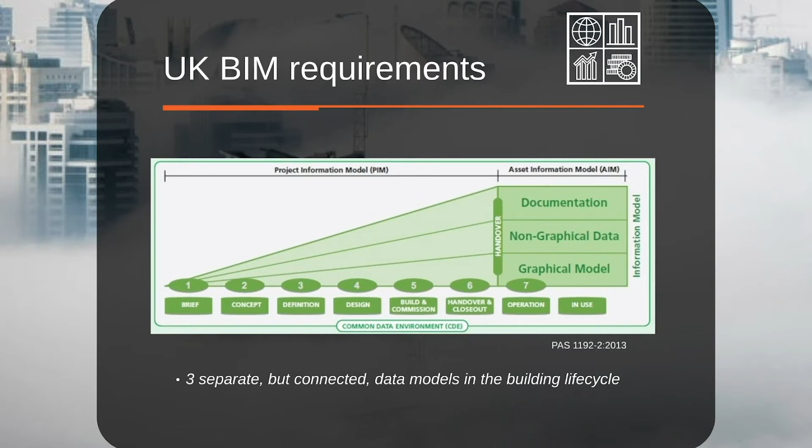We are aiming at taking care of and establishing the data models for the life cycle of the building. We started out with the requirements data model, that's the owner requirements and equipment plans. We have also been quite strong in capturing the modeling information, and we are also giving value to construction and operation. The project I'm going to talk about today is the operational phase for the Terminal 2 project, Oslo Airport.

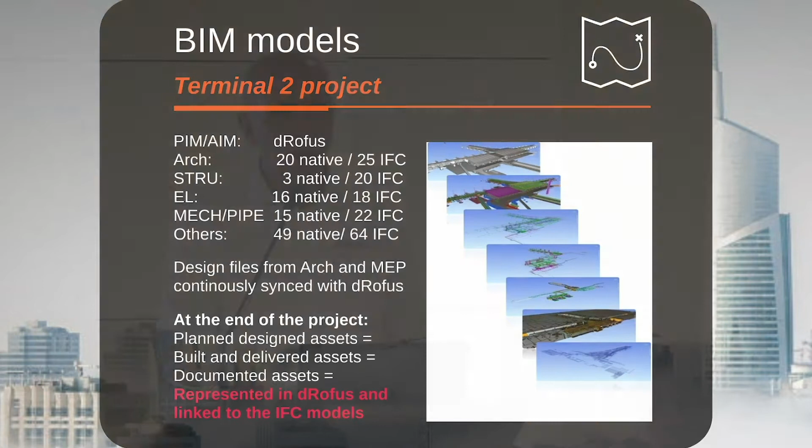They synchronized the design and engineering files continuously with dRofus. That made it possible for them to deliver at the end of the project not only updated design models, they also had a database that was connected to the design models, holding all the asset data and all the documentation about all the assets. That's a quite unique situation to have at the handover of a project. And obviously it didn't come for free. There were a lot of processes involved, which I will come back to.

And then we are into BIM in FM, and they said, if we use the same database, we have some benefits here. They will eliminate the handovers. If you use one database for assets, it's only the status change of the asset that is different. Because if you finish a project, you immediately start to renovate it.

So their issue was that we need to track our assets for security reasons from when we buy the asset until demolition. We need to know the whole history, and these handovers in project phases are messing everything up. We always lose data. Even if we use COBie, whatever we use, we want it to be in one database and simply change the status of the assets. That will solve their problem on the handovers.

Also with the documentation, if you build it up in one database, it's available throughout the project and in operation. And the maintenance people can always track back to the planning and the requirements. They use dRofus also as the one single source for creating unique IDs for assets across all applications. That made it possible for the applications to talk to each other about the same assets.

And that made this solution, where they early on said that we put in dRofus as the master asset database, not only in project, but also in operation. Then we synchronize between dRofus and their FM system, because we have not added any functionality to operate any building. We are only the container of the assets.

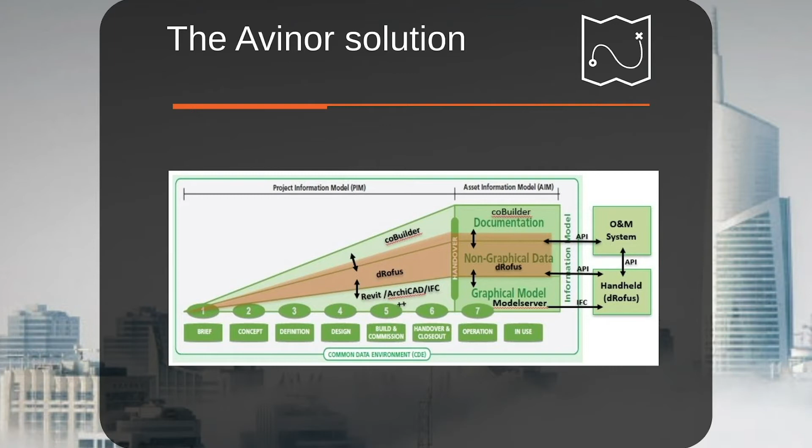And some work processes, let's focus a little bit on them. First, they did architectural programming for the project, of course, in dRofus. And this is part of the deliverable for the competition when they won the buildingSMART award in 2018. They pointed out some of the key features, and quite many of them actually. I will just highlight a few of them here, of course focusing on the parts that involve dRofus.

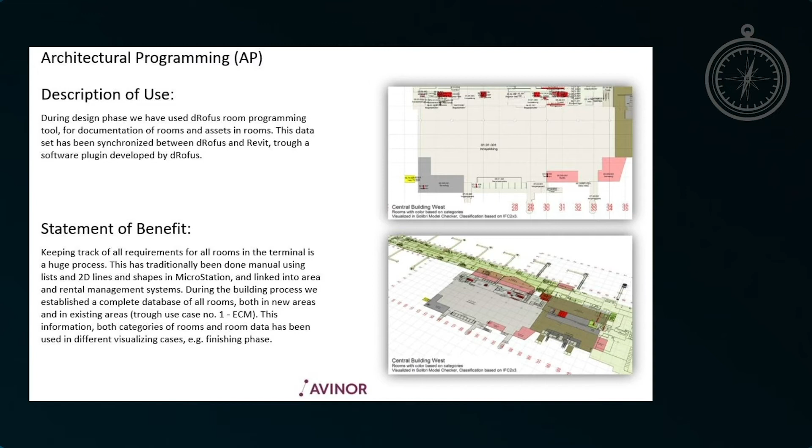Some learnings they had during the project is that the contracts in these kinds of projects don't normally have very specific descriptions on either which tools are to be used or what kind of work processes should be applied. They also learned that even if you give opportunities to the contractors and subcontractors to do this easier and more efficiently, if it is a deviation from the contract, they will still ask for more money. That's kind of the way it works all over the world, I think.

So they learned, of course, that this has to be in place very early, before you write up the contract. It's also to end up with a solution of updated models where the model actually is a digital twin. You cannot achieve that unless you're willing to pay architects and engineers to update the models to actually reflect the built environment. So what they ended up with was an investment early on to harvest that information later on in operation.

Training of staff over a project running over like 5, 6, 7 years. Obviously there's a big turnover of new people coming in. They ran continuous training in the different tools applied so that everyone was doing the job correctly. And tagging in objects, nagging about tagging.

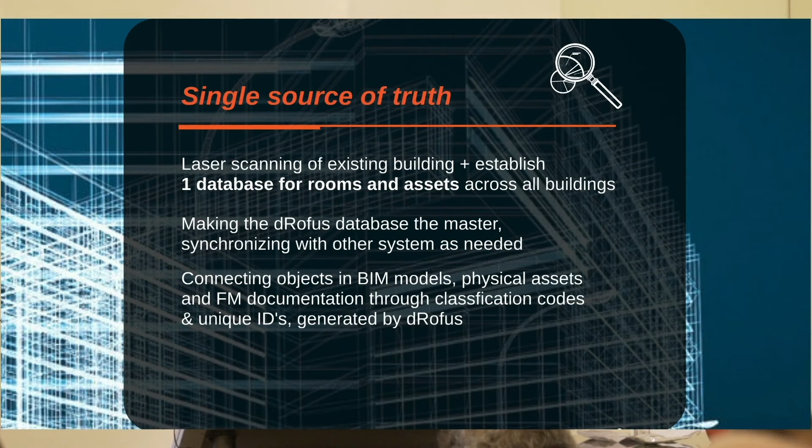And the fact that they were connecting the objects across all the disciplines, all the different tools being used, with the unique ID generated by dRofus made it possible for them to have these tools talk to each other. This is the one with code validation. The fact that they had to manually add the ID codes generated by dRofus on each object in their MEP models made it necessary for them to check that it was correct. They used Solibri for that.

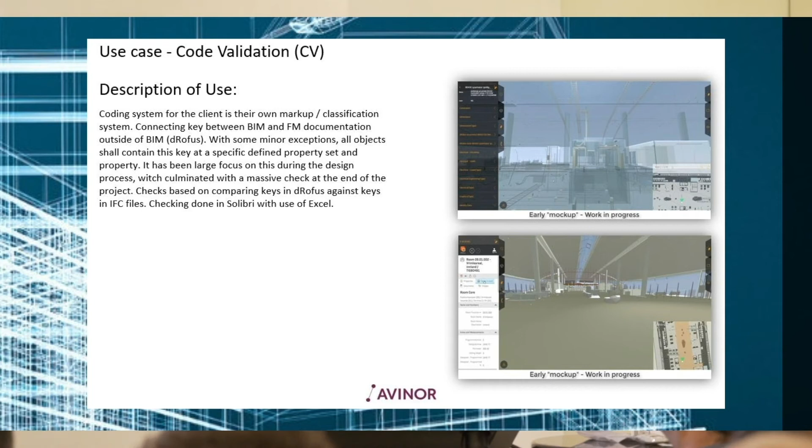And I'll now show you a tool which is called Rendra. It's a handheld tool for visualizing your models, your drawings and your documentation. On the left side here, you can see that they are browsing the data about the objects when you click the objects. But he also has built-in access to dRofus. So it immediately changes to browse both the asset register in dRofus and the model data. So you have two sources of data available for each object that you click on.

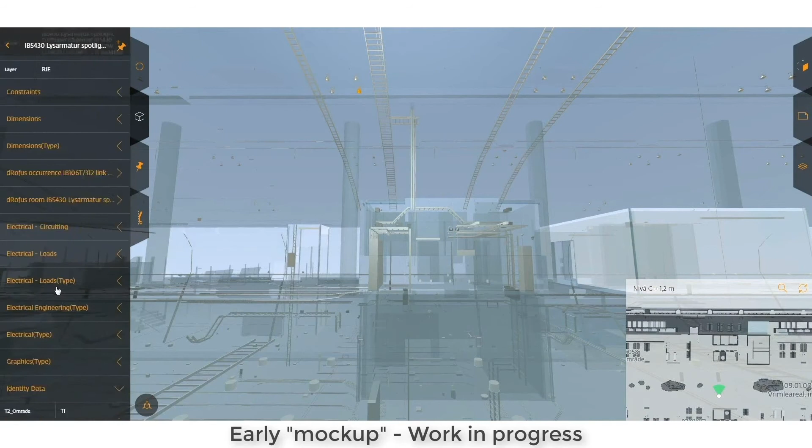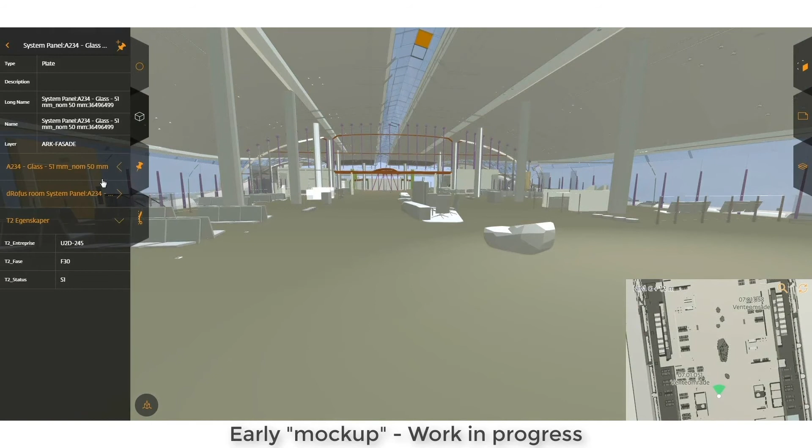Here he goes into the dRofus web, full access to all the information in dRofus, and he has access to the data in the models. And this is across a large number of models and different disciplines. So they have access to absolutely everything here: the model information, the asset information in the asset database, checking that the keys are correct, and the documentation as well. So in this project, they used this Rendra tool on site to make the models available for everyone that needed to see consolidated models.

Let's move on to what one of the managers in Avinor says here. The important thing here is to take care of the information through the whole life cycle. That means that you are building it up from one database through the whole life process.

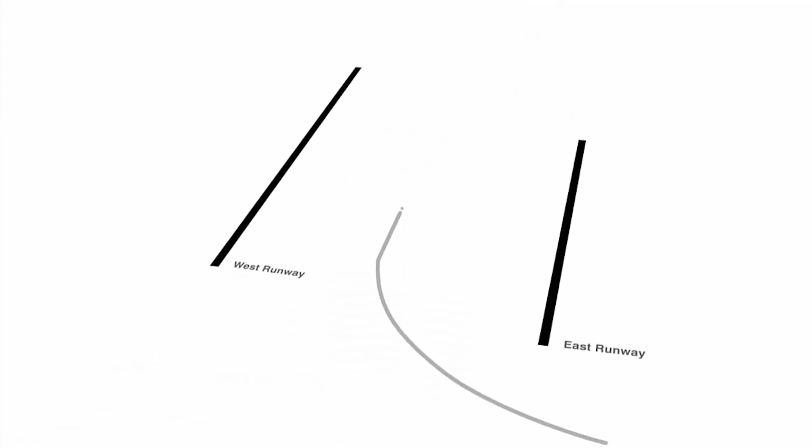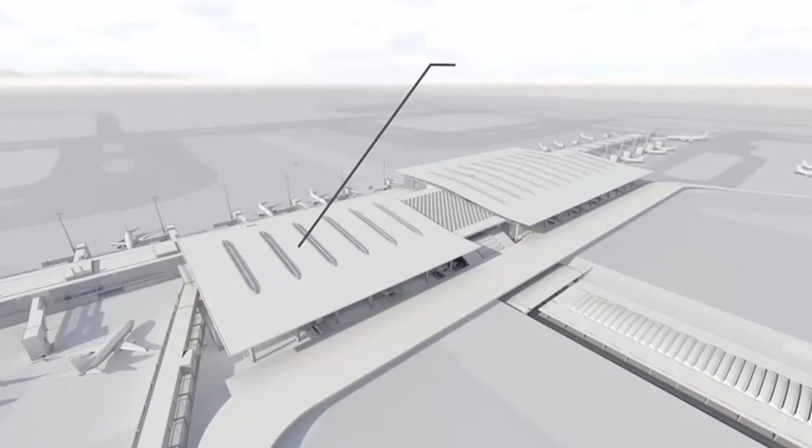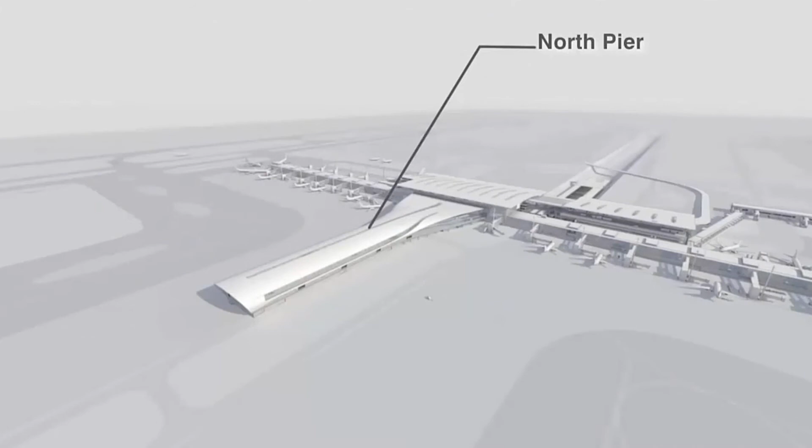What we have done now is that it's the dRofus that is the main master asset register, that you have one place where you know that you have the correct data. And then you can use that master register in all the other systems that are operating at an airport.

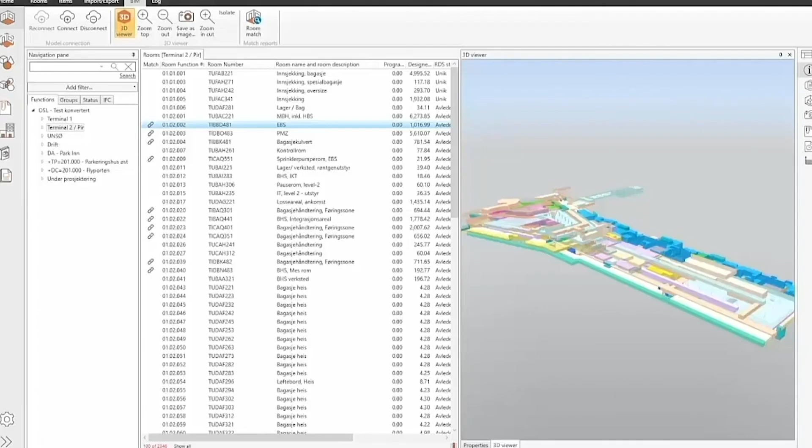The work that we have done with Avinor over the years is actually still ongoing. When they received their buildingSMART award in 2018 for design and construction, we also had some statements regarding that. And for us, this has been a project that we have focused on making this right for Avinor. And they are the only customer that currently are running with dRofus as the master asset database.

We have deliberately chosen not to sell this too hard before we are 100% sure that the solution is feature complete and ready for other customers to have as an option if they want to use dRofus in the life cycle instead of exporting all the data at the end of the project. Now we are very, very close to be there, and that's why we now also start to talk about it and give our customers the options and say that this might be something to look into.

But we have been buildingSMART members since 2003. We will always export and be able to export our data out on open formats like IFC, COBie, Excel, whatever, so no one gets a lock-in into dRofus.

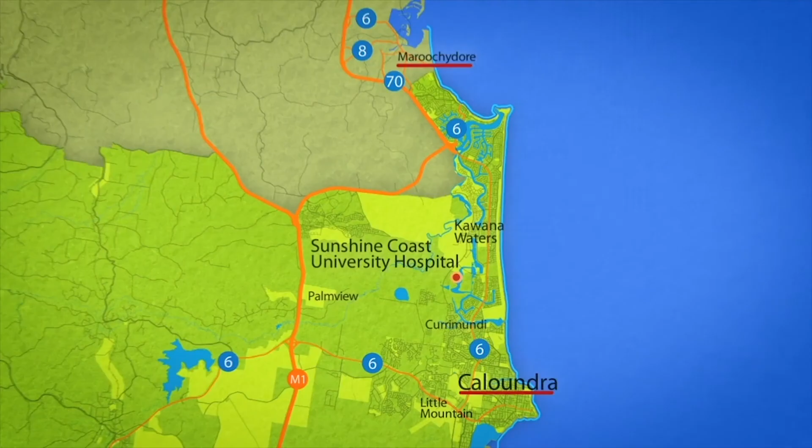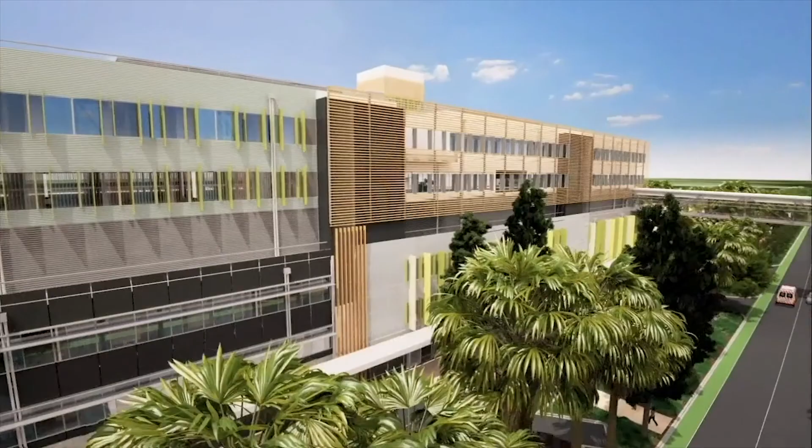Sunshine Coast University Hospital, really interesting project. First major health PPP that Queensland government undertook. The largest non-replacement greenfield hospital built in Australia in about the last 25 years, really significant. An hour and a half north of Brisbane in a rapidly expanding area called the Sunshine Coast.

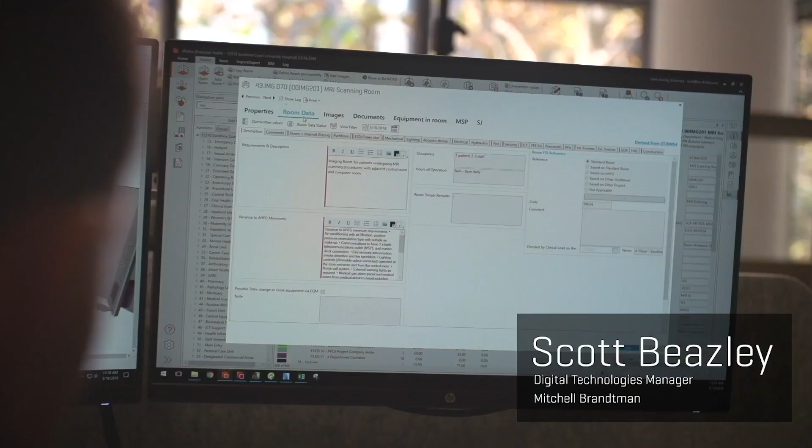We managed approximately 1,100 user groups. Throughout those user groups we generated approximately 51,000 pieces of feedback and approximately 45,000 pieces of equipment. The need for quality, coordinated documentation was paramount. The room data, which was embedded in the model, derived from dRofus, had so many other parameters that were needed to give accurate quantification for the QSs.

So when it came to specific departments which had very, very unique finishes, it was not in the model, in the geometry, but in the metadata attached to it. So that was highly valuable for us, because that information remained as the models were updated, so we could rely on where that information was and its veracity.

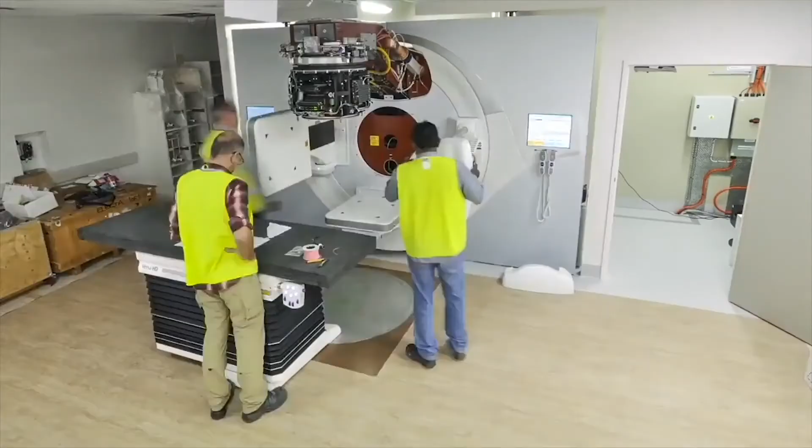On projects of this size, FF&E is always a risk. It's always a problem. The beauty of the dRofus system is your ability to customise and our ability to create very easily new fields in a multitude of different designations, just text, numbers, dates, and then utilise those fields to store data, retrieve data, is quite unique. We'd never come across anything like that before.

So to manage a project of that size, we had to rethink some of our workflow and internal processes, and we made dRofus a key part of that. So what we did there is we made dRofus sort of the single source of truth, and we made sure that all the team working in our office was clear that changes were initiated in dRofus and then they fed through from dRofus into the BIM models. That way we always had a single source of truth, and we had something that was trackable in terms of changes and responsibilities.

That kind of concludes my presentation as well, and regardless of how you want to use dRofus, whether you want to use it only in a project phase or in the operational phase or both, you are obviously free to get in touch with us. Thank you.